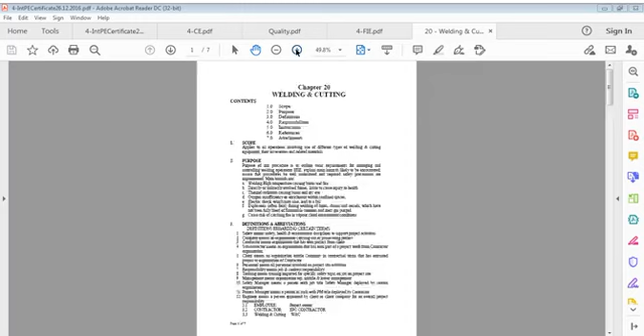These certificates cannot answer everything. Only work can answer, quality can answer, nothing else. Quality is part of life, but in fact, it's not part of life. That's the problem here. We always talk of quality and we respect quality. Quality, every day I cannot explain this way or that way. I think if you are interested, you have to learn.

You have to use your values, your knowledge, and learn it. That's the only way we can get quality improvement.

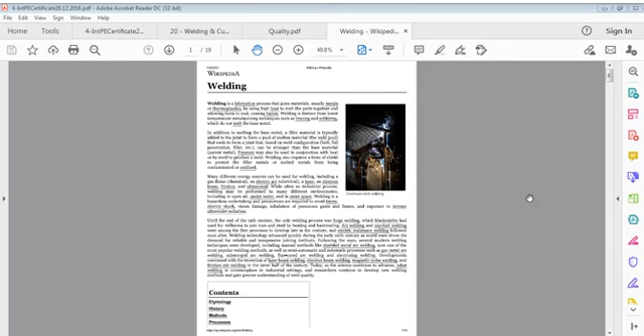Yesterday I was talking about welding and also quality as usual. Quality should be a part of life. It must be a part of life. But unfortunately, it's not a part of our life, as I explain all the time.

For many years I have been experiencing this, not only in this country but also in other countries, but now I'm talking about this country, Bharat, India, where quality actually is in minus rather than being at even zero. I can say quality does not exist anywhere in any branch of engineering or in other non-engineering sectors.

Quality is not meant what it should be. It has been used as a reference only. Every organization, every establishment thinks that having certifications of third party quality certification agencies, we can achieve whatever we want.

Certification, I think, of quality also has downgraded nowadays. Everybody claims that it is certified, but when you compare it to, when you evaluate it to product, to standards of product, well, I don't find any quality, and that's where I'm serious about.

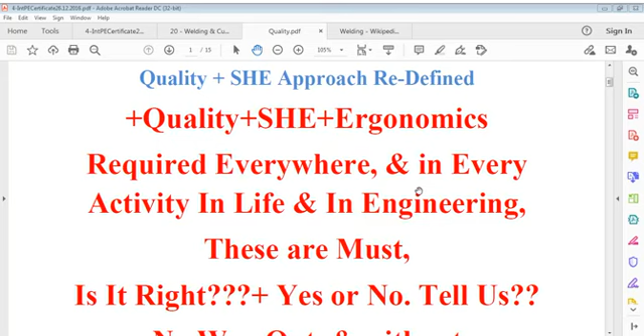Yes, they know that within this period, this material shall not suffer, this product shall work fine. They trust that, that trust they have, and that trust is their convincing power. This trust gives them a convincing power that they can convince the customer and consumer. My question is, a general question is, why should I care about warranty?

When I pay money, I pay for good product, for quality product, and I expect that whole life that product should work successfully. That's my understanding. And even then, after that, I am trapped by quality, warranted quality it has. Warranty means product shall perform, and that performance means product is made according to your requirement or specification.

That's what warranty means. But a product, if you buy, you expect that product should work for 10 years or 8 years or whatever number of years life may be of that product. Do you expect that in 1 year or 6 months or 1 week time we have to call that service, that manufacturer for service? You think that? Nobody thinks that. It's a product, it's a lifetime, and the warranty gives you a surety.

You have surety that this product shall be set right. But why do you think that 1 year warranty is enough for a 10 year product? Why should I think that? It means there is something wrong somewhere, that's why you are giving only 1 year warranty. Why do you want to give 1 year warranty and why should I accept that? Because this is a game plan, just to keep the customer shut up, calm.

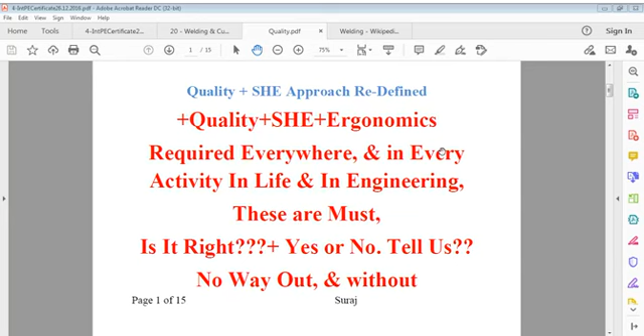Facts work in engineering, that is my first understanding. Without facts, engineering does not work. And facts: the product should be quality and should be safe for everybody, though safety is involved during production, not during performance, but performance should not go down to the level where safety is also compromised.

We'll talk of this a little later, but now my focus is on standards. I know maybe you say every day he talks this without any target. You can say that. How can you fix a target on such manufactured units or quality-required services where everybody is on the same track of no quality? There could be exceptions, I'm not saying there aren't. Everywhere there is 1%, 2%, say 5% maximum, where people are serious.

But otherwise, seriousness does not exist in anyone. It may be manufacturer, it may be industrialist, it may be other professionals like engineers, like others who are responsible to build society. Build means originally build. Engineers are called agents of society, agents of change, because whatever exists today in the form of physical development, material development, that is due to all engineers and the engineering world.

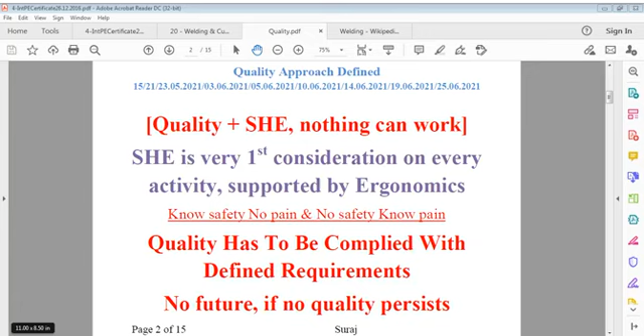Speaking is very easy, and we know doing is very difficult. Claiming is very easy, but responsibility on claims is very difficult. In the name of warranty, you can befool people, and people have no other option other than accepting what you say. But remember, even if people don't speak, they burn, self-burn. They are self-critical, because who has time to go back to the shopkeeper or to the industrialist or to the manufacturer to complain?

Everybody doesn't have that skill. Everybody cannot be so serious to fight for bad products, bad service, bad performance. It's not one product. Whatever you buy which is not natural, which is man-made or man-produced, has certain deficiencies all the time. It should not be there. Facts state that there should not be any deficiency, so that bad performance is avoided.

But disclaimer, you can say, is a very good term. It's a very easy term and a comfortable protective measure. Just put a disclaimer on something, or even on some document, that everything is beyond our control, and if you violate these conditions, even this warranty is void. It's very easy. Put any disclaimer and enjoy. So there's no claim on that. And moreover, when you buy something, it's clearly written in general cases that once material is sold, it shall not be returned.

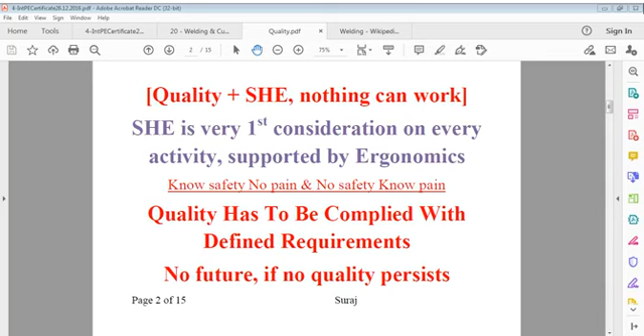That is basic. And if you can give me more, it's fine. Then I'll think to buy more and more. Simple. Because you have established trust with me. So we can say, yes, quality is complying. It means they are good people, they are professional, and we will not appreciate it so much as say this is professional work and they are professionals doing it. What's special in that? So it depends on compliance with quality, and absence of quality means no future.

Engineers must realize quality facts, because facts are part of the engineering world. It may not be prescribed in writing, but the fact still remains that you can't go free if you don't do quality work. God also tried to give quality work, but God was God and people are people. That's the difference.

Our quality system is questioned by me and by many others, because these vendors, shopkeepers, whoever they are, are very smart in managing quality and safety. They don't care. They expect only that the product should be built and sold. Your product is going to be used for many years. For sure, it should work. But when you experience it, you will find that this product cannot work for so many years.

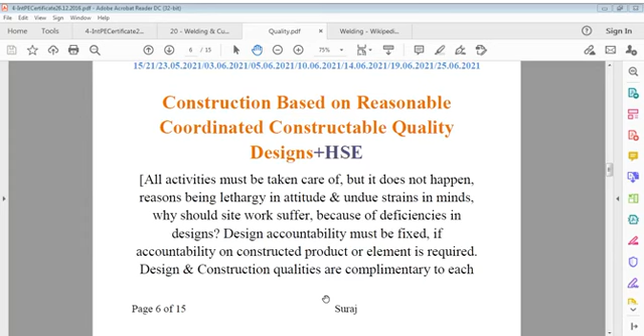Even engineers who are high profile take it on low profiles these days. A kind of understanding has been developed practically: let it go as it is, because there's no meaning in applying force, it's not going to change. That type of attitude has been developed. You may write, like I'm speaking now, you may make videos and publish. People are not interested, whatever you write, particularly youth.

In every age, youth is at stake of everything, but I don't consider it right. Youth means one has to learn. Youth doesn't mean only responsible. Youth has to learn. Youth has to mold to culture. Youth has to do a lot. Youth is energetic. Youth has energy quality, anxiety quality, hunger quality. Youth has to turn mature.

Transformation of youth stage to mature stage is required, and that's where quality input is given. Because youth was a student one time and had to learn. Then youth converted to adolescent, and that was also learning time. And now youth is fully qualified but not experienced. It's a very big challenge,

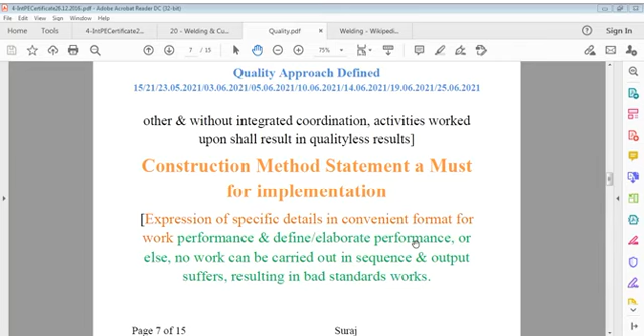Nowadays, and for more than the last 18 or 19 months, God has been busy teaching us. God tries to teach us, still trying to set ourselves right to requirement. We have to serve ourselves. We have to serve our clients. We have to serve everybody who is in that loop. Loop means the loop where quality moves from place to place. Safety moves from place to place, and a system is established. I'm talking about that.

It's not futile talk. This talk is very important, because we have to open our eyes. We have to open our minds. Engineers must open their minds and eyes, because the engineer is the only professional that can be hit by quality and that can hit others by quality. Hit means impact. If engineers don't care for this, I think it's horrible. It's like ghost work. If engineers can't care for quality, then we are destroying ourselves. We disintegrate ourselves.

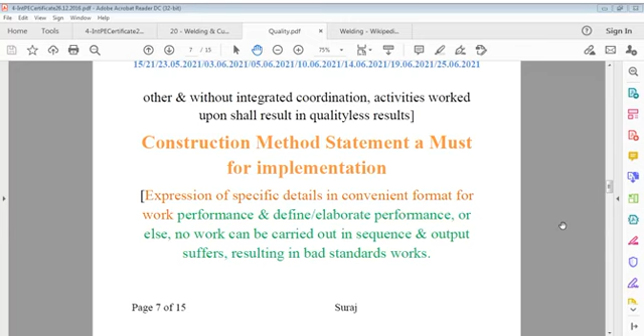Well, very boring talk. I move to something else now. I think I'll continue this. Let's go to something else also now.

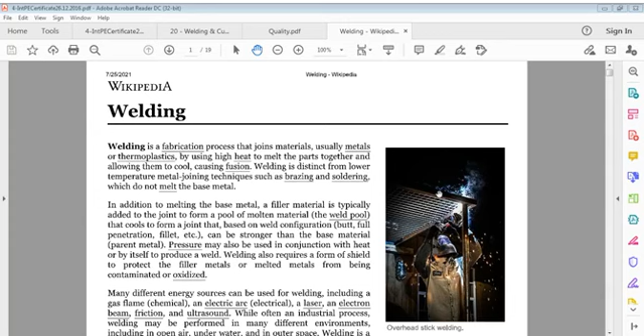I was talking of welding and cutting, which is a very important one, and I downloaded a Wikipedia page about welding, and we talked about what welding is, how it works, and a little history of welding. We talked of the term, how it worked, the history, and I can say we talked a lot on that.

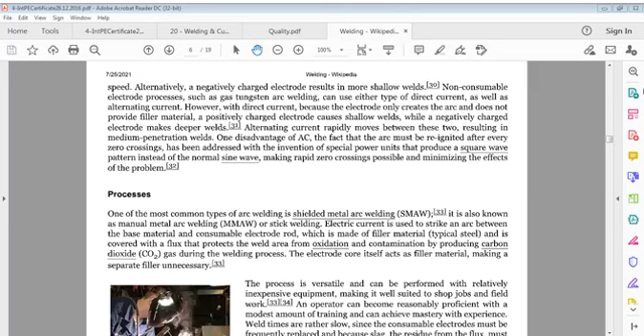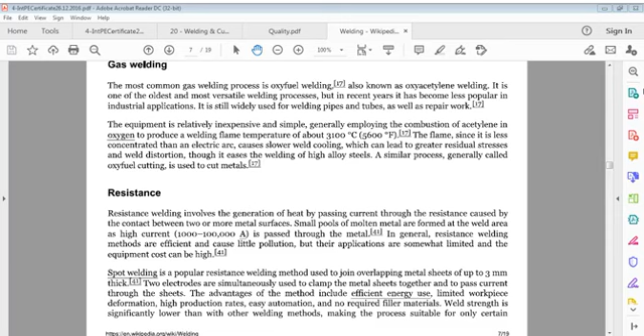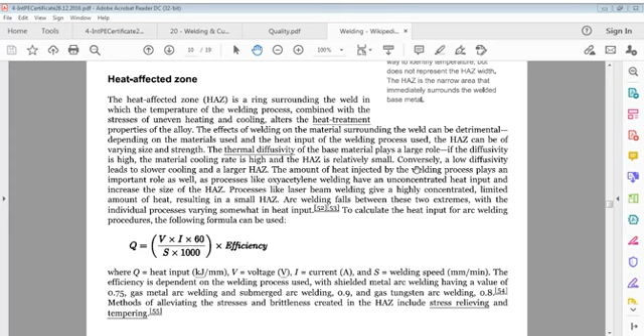Heat affected zone. I leave it to you for a couple of minutes so that I can go to the terrace and do what is required for a little while. Rest assured, by that time I'll be back and continue this technical discussion, which is about 8 pages. Then I will come back to the statement, and this is a very important page for general knowledge as well. So meanwhile, have rest, keep on this visual, read it, understand it, and I'll come back.

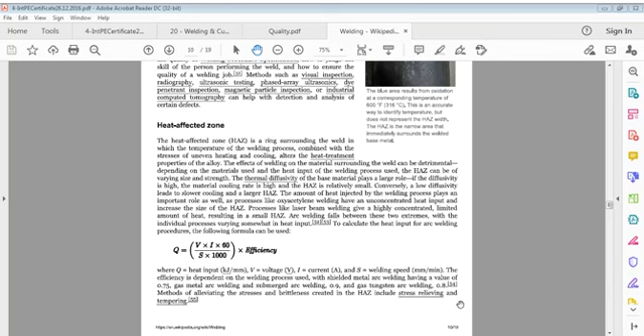we can say now I'm talking about welding, and it was heat affected zone we talked of yesterday. How to find heat input, that's a very important one. Heat affected zone, which we call HAZ.

HAZ is a ring surrounding the weld in which the temperature of the welding process, combined with stresses of uneven heating and cooling, alters the heat treatment properties of the alloy. That is the definition of heat affected zone. It means by welding, heat treatment properties of the alloy can be altered.

Effects of welding on material surrounding the weld can be detrimental, depending on materials used and heat input of the welding process used. Heat affected zone can be of varying size and strength. Thermal diffusivity of the base material plays a large role.

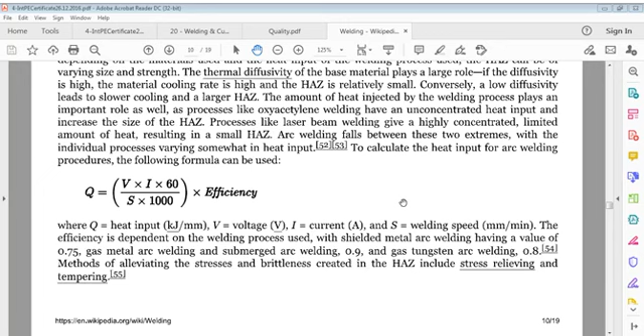Efficiency depends on the welding process used, with shielded metal arc welding having a value of 0.75, gas metal arc welding and submerged arc welding 0.9, and gas tungsten arc welding 0.8. Methods of alleviating stresses and brittleness created in the HAZ include stress relieving and tempering.

Now, lifetime extension with after-treatment methods. Durability and life of dynamically loaded welded steel structures is determined in many cases by welds, in particular weld transitions. Through a selective treatment of transitions by grinding, abrasive cutting, shot peening, high frequency impact treatment, etc., durability of many designs increases significantly.

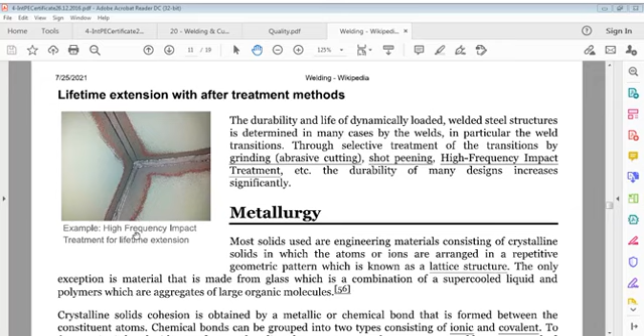So what do we say? Durability and life of dynamically loaded welded steel structures is determined in many cases by welds, in particular weld transitions. Through selective treatment of transitions by grinding, abrasive cutting, shot peening, high frequency impact treatment, etc., durability of many designs increases significantly. This is a photograph of an example, high frequency impact treatment for lifetime extension.

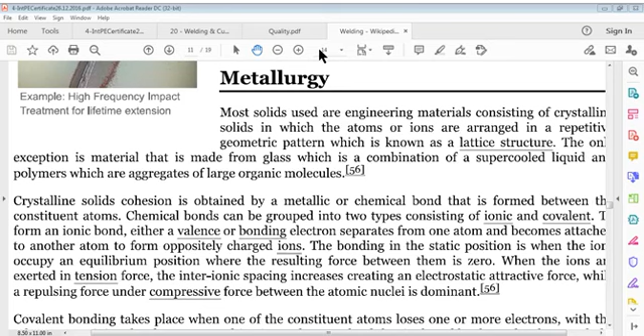Now metallurgy. Most solids used are engineering materials. It's not giving that correctly, so I take it 140, better. So it's okay.

Most solids used as engineering materials consist of crystalline solids in which atoms or ions are arranged in a repetitive geometric pattern, which is known as a lattice structure. The only exceptions are glass, which is a supercooled liquid, and polymers, which are aggregates of large organic molecules.

This is a very important statement. Definition of this material says the only exception is material where lattice structure is present in everyone. Most solids used as engineering materials consist of a crystalline structure, in which atoms or ions are arranged in a repetitive geometric pattern known as lattice structure. The only exception is glass, which is a combination of supercooled liquid, and polymers, which are aggregates of large organic molecules. In crystalline solids, cohesion is obtained by a metallic or chemical bond formed between constituent atoms.

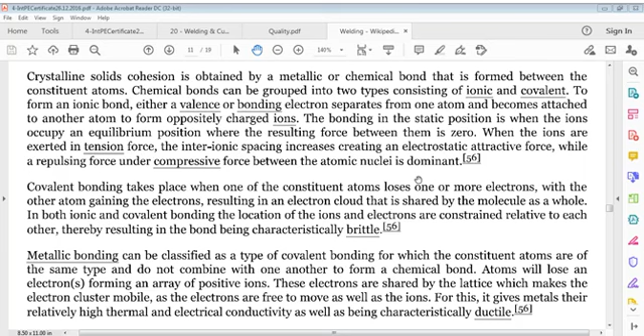Covalent bonding happens when one of the constituent atoms loses one or more electrons, with other atoms gaining electrons, resulting in an electron cloud that is shared by the molecule as a whole. In both ionic and covalent bonding, locations of ions and electrons are constrained relative to each other, resulting in the bond being characteristically brittle.

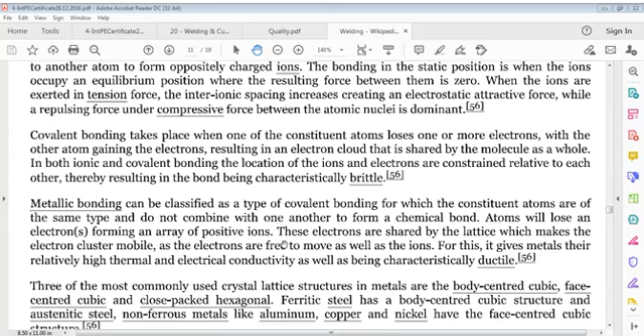Again: ions exerted in tension force increase inter-ionic spacing, creating an electrostatic attractive force, while a repulsive force under compression between atomic nuclei is dominant. The bond in static position is when ions occupy an equilibrium position where the resulting force between them is zero. Covalent bonding takes effect when one constituent atom loses one or more electrons, with another atom gaining them, resulting in an electron cloud shared by the molecule as a whole. In both ionic and covalent bonding, the locations of ions and electrons are constrained relative to each other, resulting in the bond being characteristically brittle.

Metallic bonding can be classified as a type of covalent bonding for which constituent atoms are of the same type and do not combine with one another to form a chemical bond. Atoms will lose an electron, forming an array of positive ions. These electrons are shared by the lattice, which makes the electron cluster mobile. As electrons are free to move, as well as ions, this gives metals their relatively high thermal and electrical conductivity, as well as being characteristically ductile.

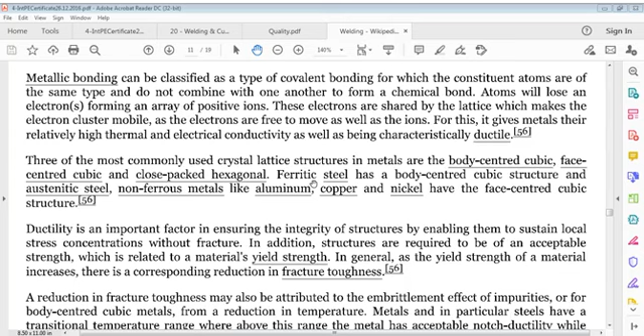Metallic bonding can be classified as a type of covalent bonding for which constituent atoms are of the same type and do not combine with one another to form a chemical bond. Atoms will lose an electron, forming an array of positive ions. These electrons are shared by the lattice, making the electron cluster mobile, as electrons are free to move as well as ions. This gives metals their relatively high thermal and electrical conductivity, as well as being characteristically ductile.

Three of the most commonly used crystal lattice structures in metals are: body-centered cubic, face-centered cubic, and close-packed hexagonal. Ferritic steel has a body-centered cubic structure.

Ferritic steel has a body-centered cubic structure, and austenitic steel and non-ferrous metals like aluminum, copper, and nickel have face-centered cubic structures.

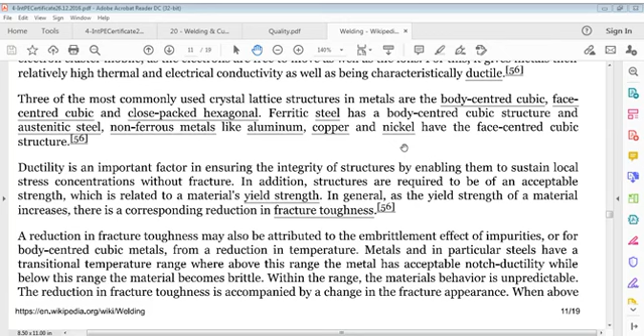A reduction in fracture toughness may also be attributed to the embrittlement effect of impurities or, for body-centered cubic metals, a reduction in temperature. Metals, particularly steels, have a transitional temperature range where above this range the metal has acceptable notch ductility, while below this range the material becomes brittle. Within the range, materials behave unpredictably. This reduction in fracture toughness is accompanied by a change in fracture appearance: above transition, fracture is primarily due to micro-void coalescence, resulting in a fibrous appearance; when temperature falls, fracture shows signs of cleavage facets. These two appearances are visible to the naked eye. Brittle fracture in steel plates may appear as chevron markings under a microscope.

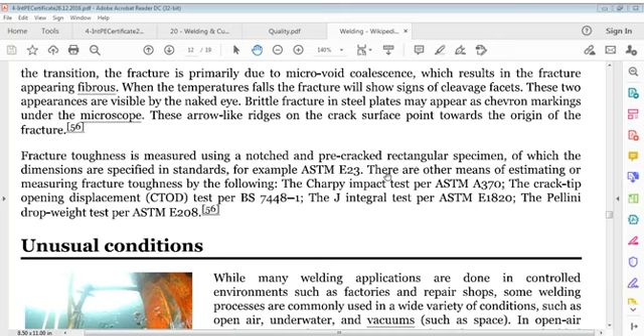So fracture toughness can be measured. We've seen that brittle fracture in steel plates may appear as chevron markings under a microscope - these arrow-like ridges on the cracked surface point toward the origin of the fracture. Fracture toughness is measured using a notched and pre-cracked rectangular specimen, with dimensions specified in standards, for example ASTM E23. There are other means of estimating or measuring fracture toughness, such as the Charpy impact test per ASTM A370, the crack tip opening displacement (CTOD) test per BS 7448-1, the J-integral test per ASTM E1820, and the drop weight test per ASTM E208. We'll also look at unusual conditions. Hold on, pause.

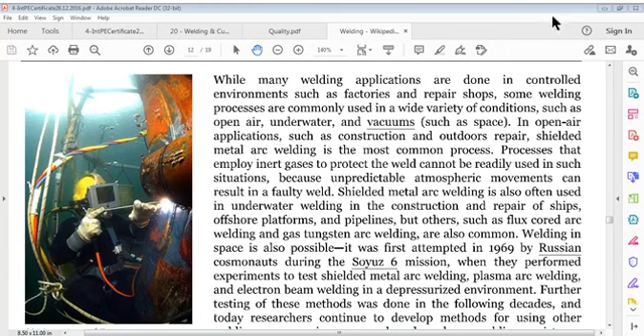Welding in space is also possible. It was first attempted in 1969 when Russian cosmonauts during the Soyuz 6 mission performed experiments to test shielded metal arc welding, plasma arc welding, and electron beam welding in a depressurized environment. Further testing of those methods was done in following decades, and today researchers continue to develop methods for using other welding processes in space, such as laser beam welding, resistance welding, and friction welding. Advances in these areas may be useful for future endeavors similar to construction of the International Space Station, which could rely on welding for joining in space parts that were manufactured on Earth.

Safety issues. Welding can be dangerous and unhealthy if proper precautions are not taken. However, using new technology and proper protection greatly reduces risks of injury and death associated with welding. Since many common welding procedures involve an open electric arc or flame, risk of burns and fire is significant. This is why it is classified as a hot work process.

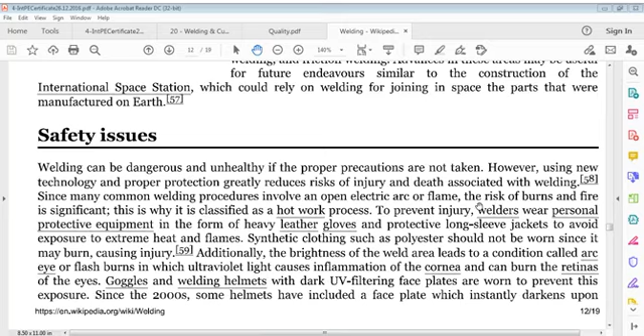Goggles and welding helmets with dark ultraviolet filtering face plates are worn to prevent this exposure. Since the 2000s, some helmets have included a faceplate which instantly darkens upon exposure to intense UV light.

To protect bystanders, the welding area is often surrounded with translucent welding curtains. These curtains are made of polyvinyl chloride plastic film and shield people outside the welding area from ultraviolet light of the electric arc, but cannot replace the filter glass used in the helmet.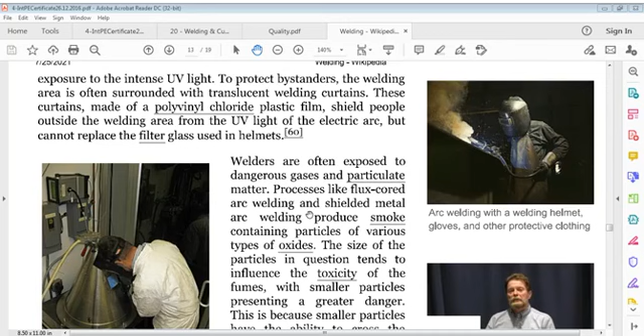Welders are often exposed to dangerous gases and particulate matter. Processes like flux cored arc welding and shielded metal arc welding produce smoke containing particles of various types of oxides. The size of particles in question tends to influence toxicity of fumes, with smaller particles presenting a greater danger.

This is because smaller particles have the ability to cross the blood-brain barrier. Fumes and gases such as carbon dioxide, ozone, and fumes containing heavy metals can be dangerous to welders lacking proper ventilation and training.

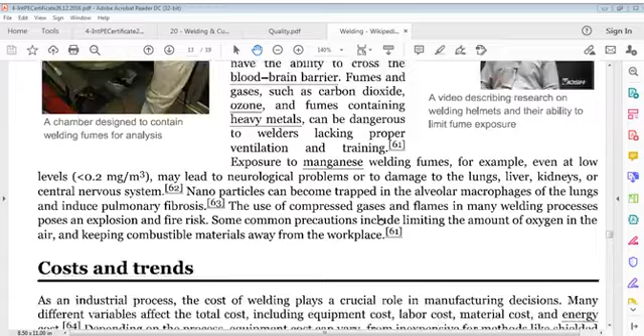Costs and trends. As an industrial process, the cost of welding plays a crucial role in manufacturing decisions. Many different variables affect total cost, including equipment cost, labor cost, material cost, and energy cost.

Depending on the process, equipment cost can vary from inexpensive for methods like shielded metal arc welding and oxyfuel welding, to extremely expensive for methods like laser beam welding and electron beam welding. Because of their high cost, they are only used in high production operations. Similarly, because automation and robots increase equipment costs, they are only implemented when high production is necessary.

Labor cost depends on deposition rate, rate of welding, hourly wage, and total operation time, including time spent fitting, welding, and handling the part. Cost of materials includes cost of base and filler material and cost of shielding gases. Finally, energy cost depends on arc time and welding power demand.

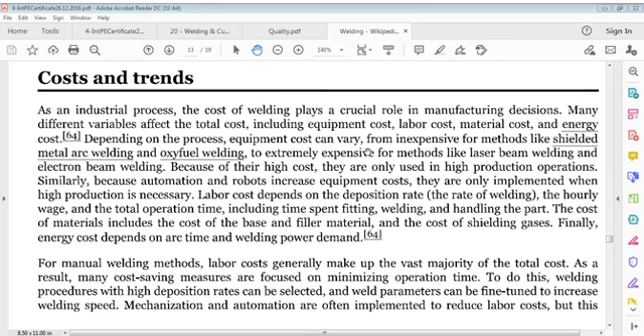For manual welding methods, labor cost generally makes up the vast majority of total cost. As a result, many cost saving measures are focused on minimizing operation time. To do this, welding procedures with high deposition rates can be selected and weld parameters can be fine-tuned to increase welding speed. Mechanization and automation are often implemented to reduce labor costs, but this frequently increases cost of equipment and creates additional setup time. Material costs tend to increase when special properties are necessary, and energy costs normally do not amount to more than several percent of total welding cost.

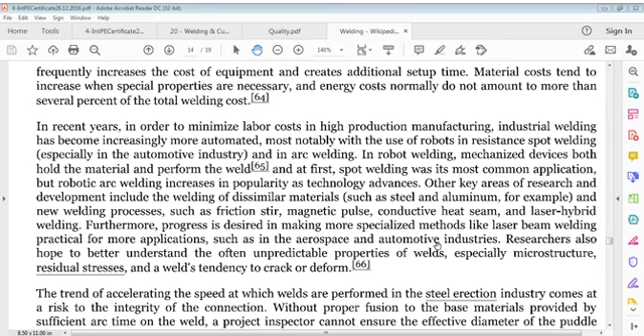Furthermore, progress is desired in making more specialized methods like laser beam welding practical for more applications, such as in aerospace and automotive industries. Researchers also hope to better understand often unpredictable properties of welds, especially microstructure, residual stresses, and a weld's tendency to crack or deform.

Trend of accelerating speed at which welds are performed in steel erection industry comes at a risk to integrity of connection. Without proper fusion to base materials provided by sufficient time on weld, a project inspector cannot ensure effective diameter of puddle weld. Therefore, he or she cannot guarantee published load capacities unless they witness actual installation.

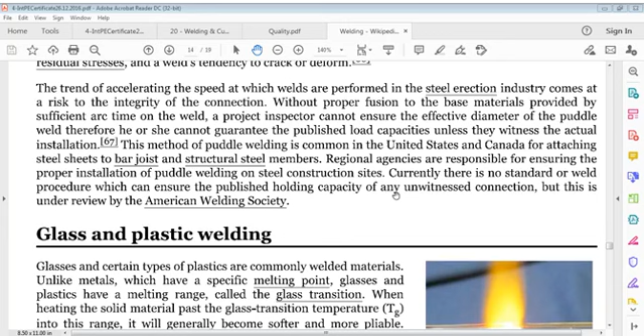This method of puddle welding is common in United States and Canada for attaching steel sheets to bar joist and structural steel members. Regional agencies are responsible for ensuring proper installation of puddle welding on steel construction sites. Currently, there is no standard or weld procedure which can ensure published holding capacity of any unwitnessed connection, but this is under review by American Welding Society. Glass and plastic weld.

Glass and plastic welds. Glasses and certain types of plastics are commonly welded materials. Unlike metals which have a specific melting point, glasses and plastics have a melting range called glass transition. When heating solid material past glass transition temperature into this range, it will generally become softer and more pliable.

When it crosses through range above glass melting temperature, it would become a very thick, sluggish, viscous liquid, slowly decreasing in viscosity as temperature increases. Typically, this viscous liquid shall have very little surface tension compared to metals, becoming a sticky, taffy and honey-like consistency. So welding can usually take place by simply pressing two melted surfaces together. Two liquids will generally mix and join at first contact.

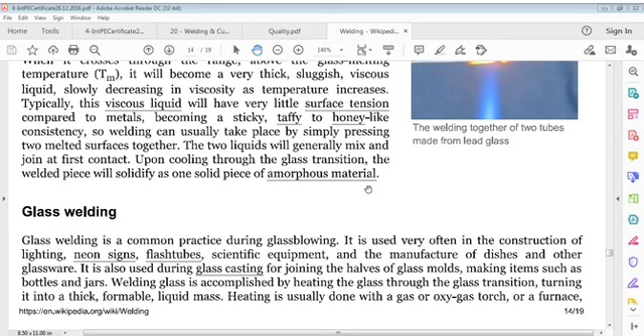Welding glass is accomplished by heating glass through glass transition, turning it into a thick, formable liquid mass. Heating is usually done with a gas or oxy-gas torch or a furnace. Temperatures for melting glass are often quite high. This temperature may vary depending on type of glass. For example, lead glass becomes a weldable liquid at around 870 degrees Celsius and can be welded with a simple propane torch.

On the other hand, quartz glass is fused silica. Then we can say 870 degrees Celsius can be welded with a simple propane torch. On the other hand, quartz glass, which is fused silica, must be heated to over 1650 degrees Celsius, but quickly loses its viscosity and formability if overheated. So an oxyhydrogen torch must be used. Sometimes a tube may be attached to glass, allowing it to be blown into various shapes.

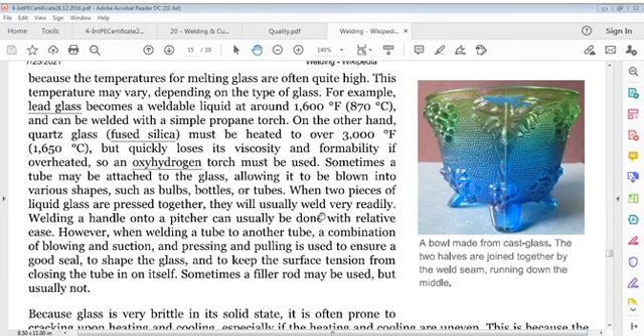When two pieces of liquid glass are pressed together, they shall usually weld very readily. Welding a handle onto a pitcher can usually be done very readily. When two pieces of glass are pressed together, they will usually weld very readily. Welding a handle onto a pitcher can usually be done with relative ease. However, when welding a tube to another tube, a combination of blowing and suction and pressing and pulling is used to ensure a

So we can say in this case, however, when welding a tube to another tube, a combination of blowing and suction and pressing and pulling is used to ensure a good seal, to shape glass and to keep surface tension from closing the tube on itself. Sometimes a filler rod may be used, but usually not.

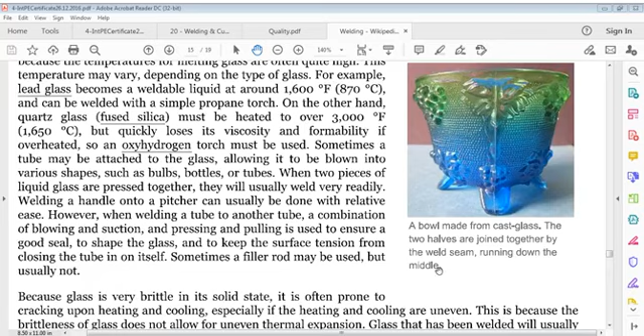Because glass is very brittle in its solid state, it's often prone to cracking upon heating and cooling, especially if heating and cooling are uneven. This is because brittleness of glass does not allow for uneven thermal expansion. Glass that has been welded shall usually need to be cooled very slowly and evenly through glass transition in a process called annealing, to relieve any internal stresses created by temperature gradient.

There are many types of glasses, and it's most common to weld using same types. Different glasses often have different rates of thermal expansion, which can cause them to crack upon cooling when they contract differently. For instance, quartz has very low thermal expansion, while soda lime glass has very high thermal expansion.

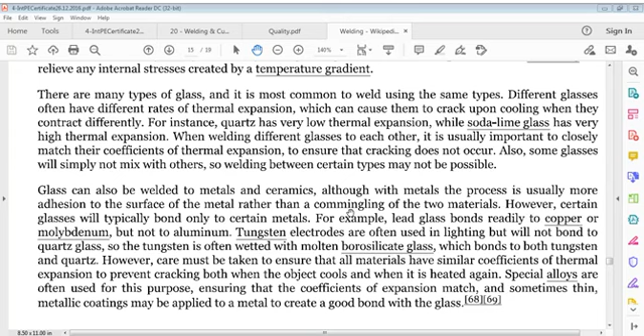When welding different glasses to each other, it's usually important to closely match their coefficients of thermal expansion to ensure that cracking doesn't occur. Also, some glasses simply do not mix with others, so welding between certain types may not be possible.

Glass can also be welded to metals and ceramics, although with metals the process is usually more adhesion to the surface of the metal rather than a commingling of two materials.

Glass can also be welded to metals and ceramics, although with metals the process is usually more adhesion to the surface of the metal rather than a commingling of two materials. However, certain glasses will typically bond only to certain metals. For example, lead glass bonds readily to copper or molybdenum, but not to aluminum. Tungsten electrodes are often used in lighting but will not bond to quartz glass.

So tungsten is often wetted with molten borosilicate glass.

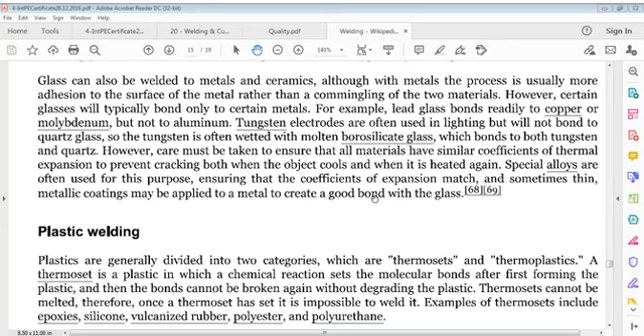Special alloys are often used for this purpose, ensuring that coefficients of expansion match, and sometimes thin metallic coatings may be applied to the metal to create a good bond with glass. Plastic welding.

Plastics are generally divided into two categories, which are thermosets and thermoplastics. A thermoset is a plastic in which a chemical reaction sets molecular bonds after first forming the plastic, and then the bonds cannot be broken again without degrading the plastic. Thermosets cannot be melted; therefore, once a thermoset has set, it is impossible to weld it. Examples of thermosets include epoxies, silicone, vulcanized rubber, polyester, and polyurethane.

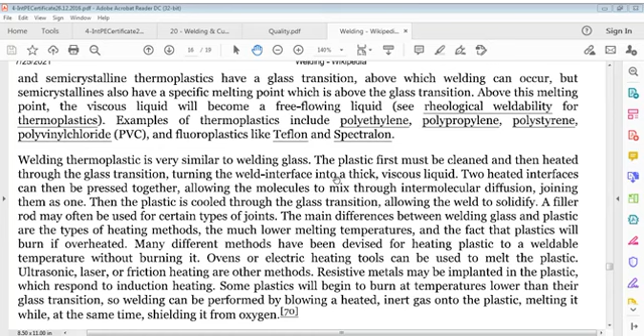Welding thermoplastics is very similar to welding glass. The plastic first must be cleaned and then heated through the glass transition, turning the weld interface into a thick viscous liquid. Two heated interfaces can then be pressed together, allowing molecules to mix through intermolecular diffusion.

Two heated interfaces can then be pressed together, allowing molecules to mix through intermolecular diffusion, joining them as one. Then the plastic is cooled through the glass transition, allowing the weld to solidify.

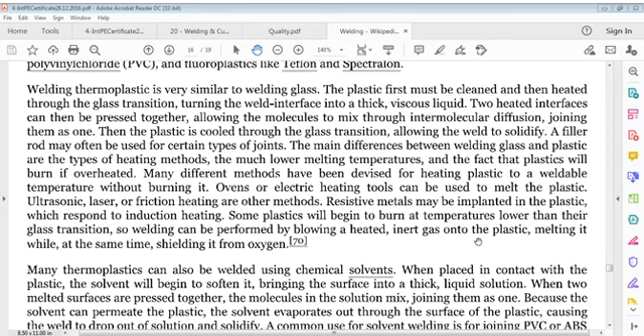Many thermoplastics can also be welded using chemical solvents. When placed in contact with plastic, the solvent begins to soften it, bringing soft surfaces into a thick liquid solution. When two melted surfaces are pressed together, molecules in solution mix, joining them as one. Because the solvent can permeate plastics, the solvent evaporates out through the surfaces of the plastics, causing the weld to drop out of solution and solidify.

A common use for solvent welding is for joining PVC or ABS. ABS is acrylonitrile butadiene styrene, pipes during plumbing, or welding styrene and polystyrene plastics.

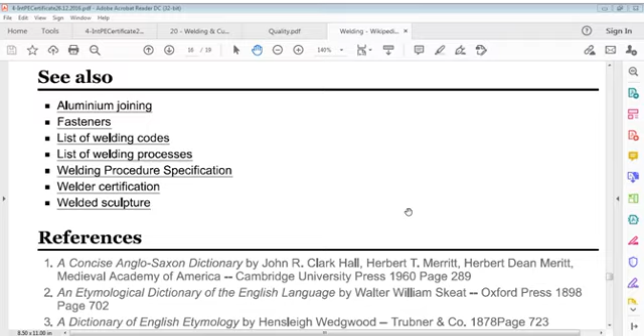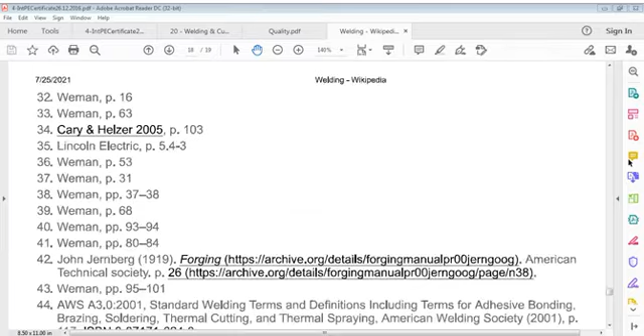So solvent welding is especially effective on plastics like PVC, which burn at or below their glass transition, but may be ineffective on plastics like Teflon or polyethylene that are resistant to chemical decomposition. So we can go back to see what we have done or learned.

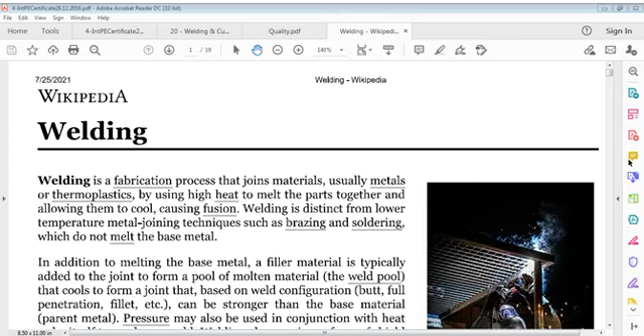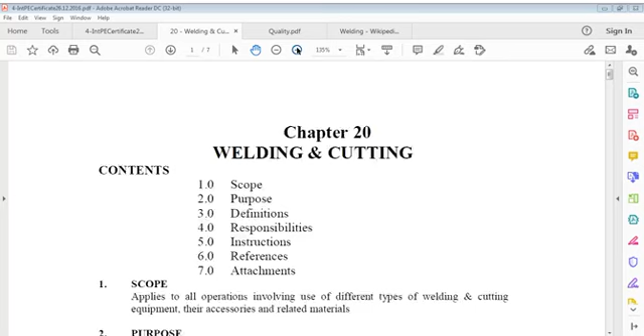It's welding, an interesting one. And now we'll go to our understanding of this welding method statement, which is actually our requirement. In this we have gone to see what the welding method statement was. The scope is that it applies to operations involving use of different types of welding and cutting equipment, their accessories and related materials. This is our scope in this method statement.

The purpose of this statement is to outline basic requirements for managing, organizing and controlling welding operations, explain the main SHE hazards likely to be encountered, and assure that procedures are well understood and required safety precautions are implemented. The main hazards which we observe are welding high temperature causing burns and fire. This is the first one.

Directly or indirectly evolved fumes liable to cause injury to health. Thermal radiation causing burns and arc eye, oxygen insufficiency or enrichment within confined spaces, electric shock which may also lead to a fall,

explosions, often fatal, during welding of tanks, drums and vessels which have not been fully freed of inflammable contents, and inert gas purged, causing risk of catching fire in vapor cloud environment conditions. These are a few. I repeat this, it's very important from every viewpoint.

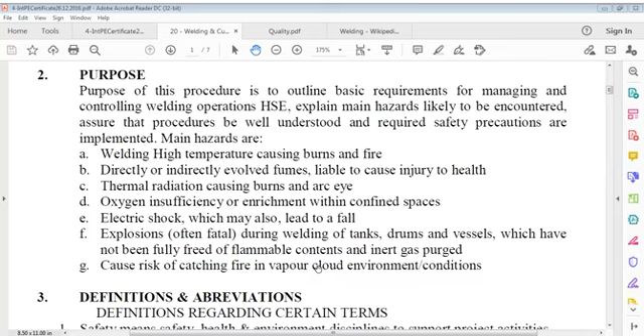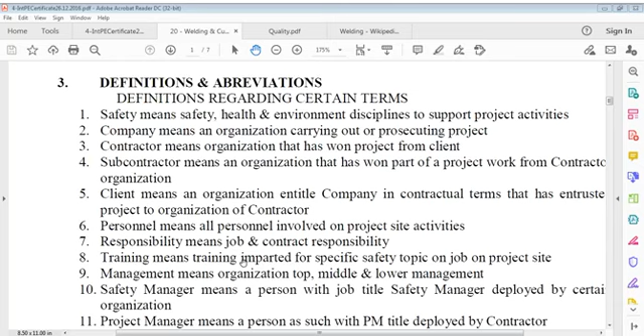Definitions. It's repetitive, but because this is the welding one, let us see. Safety means safety, health and environment discipline to support project activities. Company, contractor, subcontractor, client, as we defined before, and personnel, responsibility, training and management, safety, project management. Okay, let's go further. Competent person: a person nominated as competent to assume overall control of welding and cutting operations.

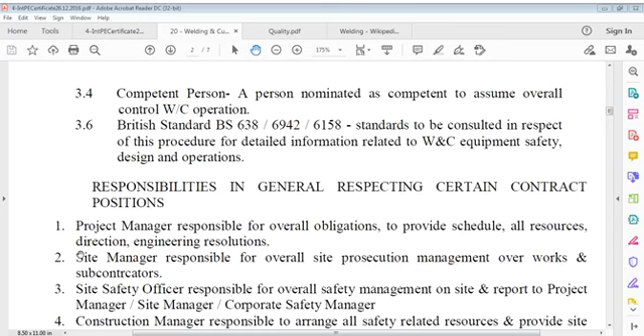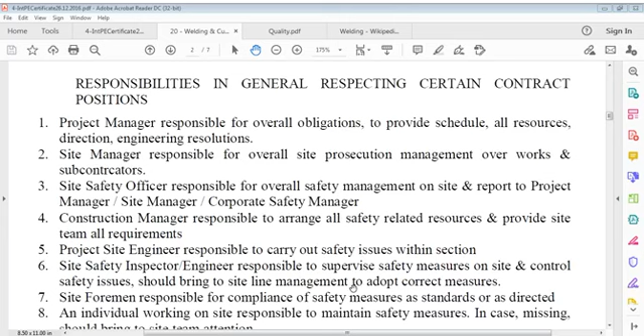British standard BS 638/6942/6158 standards to be consulted in respect of this procedure for detailed information related to welding and cutting equipment safety, designs and operations. Responsibilities in general respecting certain contract positions, and these are, I think, same as before: project manager, site manager, safety one, construction manager, project site engineer. So there's nothing specific in this.

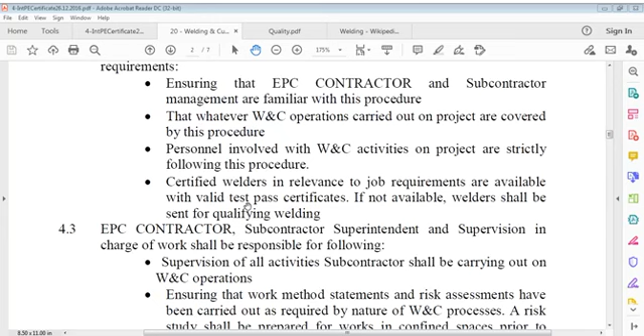Certified welder is very important here. Certified welders relevant to job requirements must be available, that's why I have to make sure, with valid test pass certificates. If not available, welders shall be sent for qualifying that test. So let us see this.

EPC contractor, what is this? Supervision of all activities the subcontractor shall be carrying out on welding and cutting operations, ensuring that work method statements and risk assessments have been carried out as required by the nature of welding and cutting processes. A risk study shall be prepared.

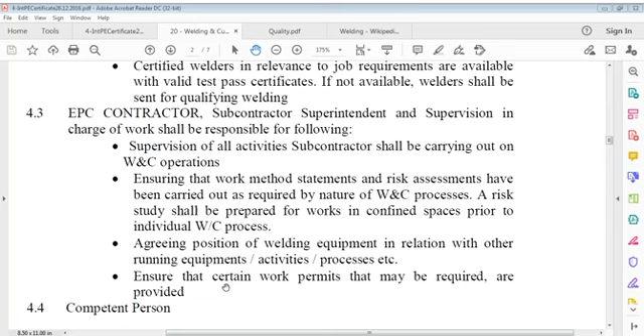Ensuring that work method statement and risk assessment have been carried out as required by the nature of welding and cutting processes. A risk study shall be prepared for works in confined spaces prior to individual welding or cutting process. Agreeing position of welding equipment in relation with other running equipment, activities, processes. Ensure that certain work permits that may be required are provided.

Competent person. For the purpose of this procedure, whichever subcontractor organization is involved in welding and cutting operations on site shall appoint a competent person approved by the EPC contractor to have overall control of welding and cutting operations. Competent person's duties specified cover assessment and planning of welding and cutting activities with regard to selection of safety gear, equipment, instructions and supervision.

Ensure that equipment selected has been adequately inspected and maintained. Arrange for replacement in case of equipment breakdown. Ensure that an effective procedure is implemented for reporting defects, taking into account remedial actions. Responsibility for organization and control of welding and cutting operations, stopping all unsafe operations and reporting all incidents. Act according to requirement in case of fire breakout due to welding effects.

So let's repeat. What the competent person's duties specifically cover is assessment and planning of welding and cutting activities with regard to selection of safety gear, equipment, instruction and supervision. Ensure that equipment selected is adequately inspected, tested and maintained. Arrange for replacement in case of equipment breakdown. Ensure that an effective procedure is implemented for reporting defects, taking into account remedial actions.

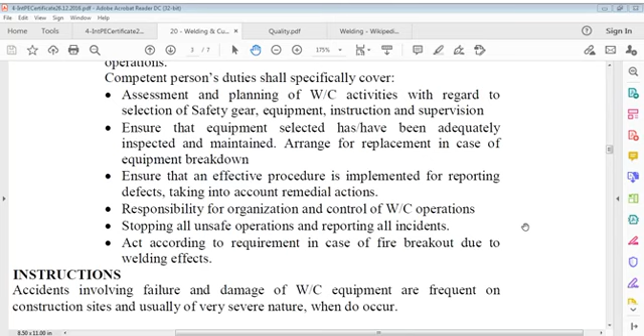Responsibility for organization and control of welding and cutting operations, stopping all unsafe operations and reporting all incidents, acting according to requirement in case of fire breakout due to welding effects. Instructions.

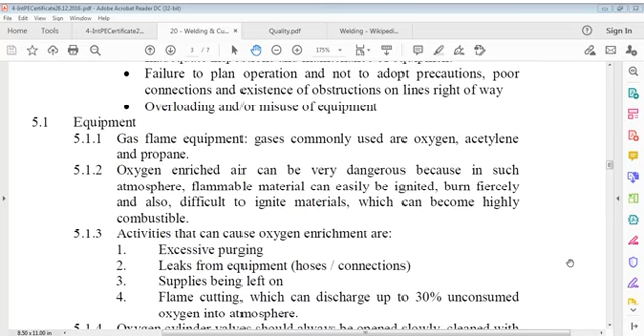Accidents involving failure and damage to welding and cutting equipment are frequent on construction sites and usually of a very severe nature when they do occur. Causal factors leading to such accidents include operator's error, inadequate inspection and maintenance of equipment, failure to plan the operation and to adopt precautions, poor connections and existence of obstructions on lines, right of way, overload and/or misuse of equipment.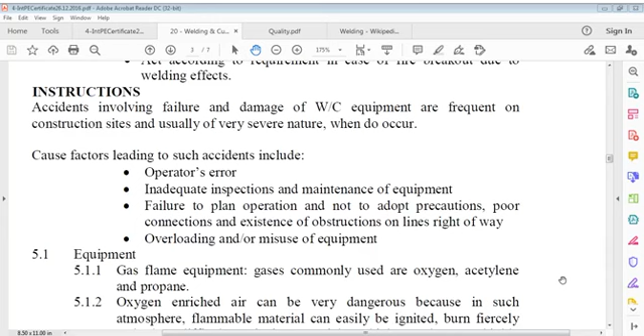Gas flame equipment commonly uses oxygen, acetylene and propane. Oxygen enriched air can be very dangerous because in such an atmosphere, flammable material can easily be ignited and burn fiercely, and even difficult-to-ignite materials can become highly combustible.

Activities that can cause oxygen enrichment are excessive purging, leaks from equipment, hoses and connections, supplies being left on, and flame cutting, which can discharge up to 30% unconsumed oxygen into the atmosphere.

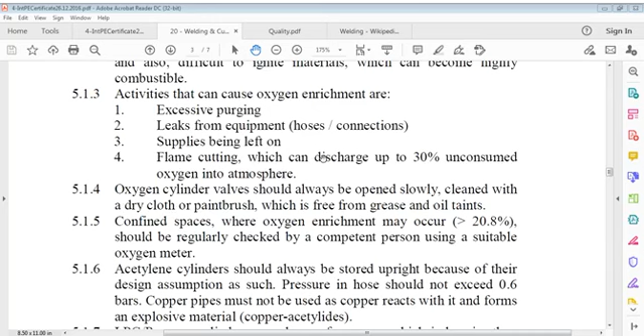Oxygen cylinder valves should always be opened slowly and cleaned with a dry cloth or paintbrush free from grease and oil taints. Confined spaces where oxygen enrichment may occur greater than 20.8% should be regularly checked by a competent person using a suitable oxygen meter.

Acetylene cylinders should always be stored upright.

Oxygen cylinder valves should always be opened slowly and cleaned with a dry cloth or paintbrush that is free from grease and oil taints. Confined spaces where oxygen enrichment may occur greater than 20.8% should be regularly checked by a competent person using a suitable oxygen meter. Acetylene cylinders should always be stored upright because of their design assumptions.

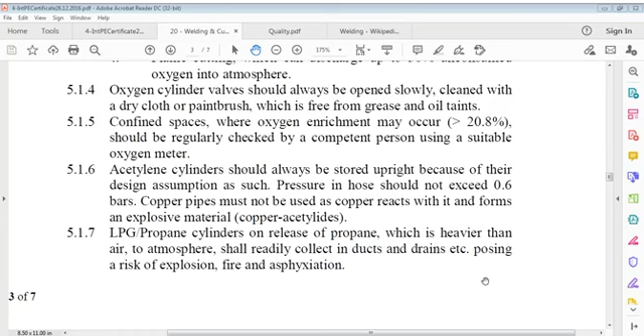Fuel gas and oxygen supplies should be stored separately, at least 6 meters apart in the open. If kept inside, the store should be of fire-resisting construction with ventilation provided at top and bottom. Lighting illumination to the store should be either from outside the store, or the structure should be made of flame-proof construction.

All cylinders in use must be kept secured, either in a cylinder trolley or lashed to a suitable support. Acetylene and propane cylinders must always be used in an upright position, because liquid may discharge through the valve or damage equipment.

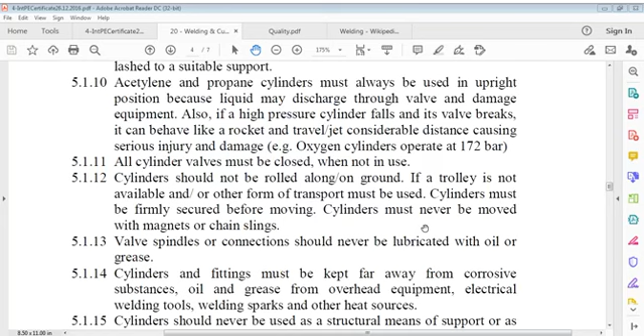All cylinder valves must be closed when not in use. Cylinders should not be rolled along the ground. If a trolley is not available, other forms of transport must be used, and cylinders must be firmly secured before moving. Cylinders must never be moved with magnets or chain slings.

Valve spindles or connections should never be lubricated with oil or grease. Cylinders and fittings must be kept far away from corrosive substances, oil and grease, overhead equipment, electrical welding tools, welding sparks and other heat sources.

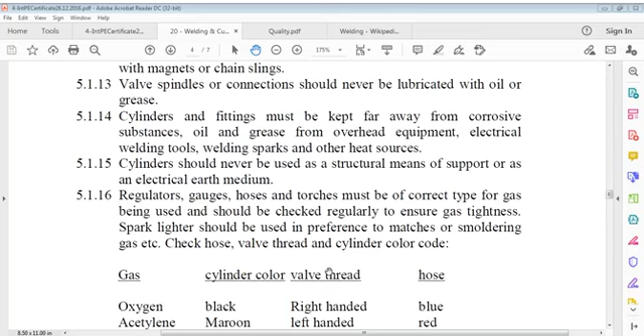Cylinders should never be used as a structural means of support or as an electrical earth medium. Regulators, gauges, hoses and torches must be of the correct type for the gas being used, and should be checked regularly to ensure gas tightness.

A spark lighter should be used in preference to matches or smoldering gas. Check the hose, valve thread and cylinder's color code. What are those? Gas, cylinder color, valve thread and hose.

Oxygen is black cylinder color, valve thread is right-handed, hose is blue. Acetylene is maroon color cylinder, valve is left-handed.

So, oxygen cylinder is black, right-handed, hose is blue. Acetylene cylinder is maroon, left-handed, hose is red. Propane cylinder is red, left-handed, hose is orange.

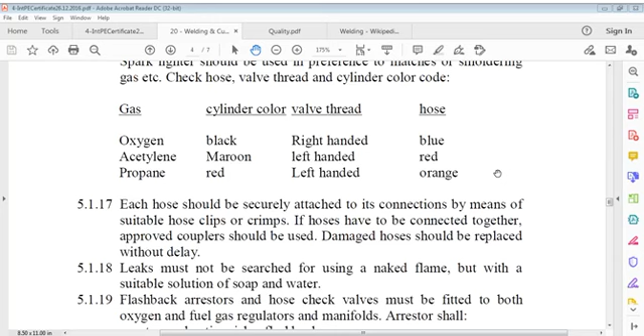Each hose should be securely attached to its connections by means of suitable hose clips or crimps. If hoses have to be connected together, approved couplers should be used. Damaged hoses should be replaced without delay. Leaks must not be searched for with a naked flame.

We can see now each hose should be securely attached to its connection by means of suitable hose clips or crimps. If hoses have to be connected together, approved couplers should be used. Damaged hoses should be replaced without delay.

Leaks must not be searched for using a naked flame, but with a suitable solution of soap and water.

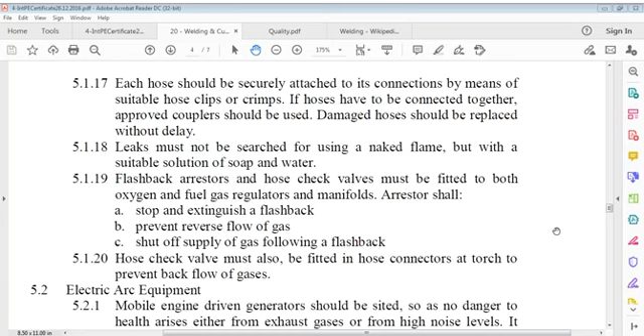Flashback arresters and hose check valves must be fitted to both oxygen and fuel gas regulators and manifolds. Arresters shall stop and extinguish a flashback.

They prevent reverse flow of gas and shut off supply of gas following a flashback. Hose check valves must also be fitted in hose connectors at the torch to prevent backflow of gases.

Electric arc equipment: mobile engine driven generators should be sited so that no danger to health arises either from exhaust gases or from high noise levels.

It should be located far away from the work area, and extension leads provided to bring welding electrical supplies to the work point.

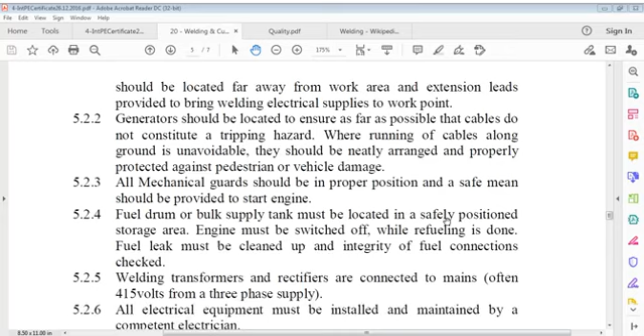Generators should be located to ensure, as far as possible, that cables do not constitute a tripping hazard. Where running of cables along the ground is unavoidable, they should be neatly arranged and properly protected against pedestrian or vehicle damage. All mechanical guards should be in proper position and a safe means should be provided to start the engine.

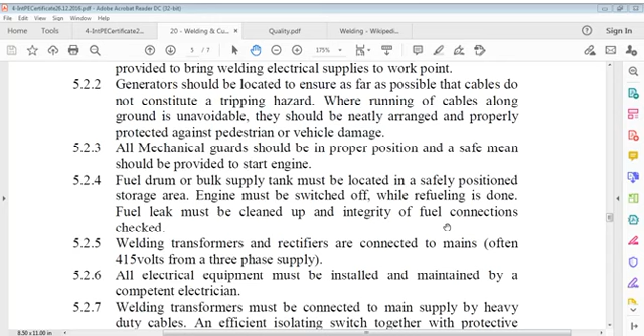Fuel drum or bulk supply tank must be located in a safely positioned storage area.

The engine must be switched off while refueling is done. Fuel leaks must be cleaned up and the integrity of fuel connections checked.

Welding transformers and rectifiers. Welding transformers and rectifiers are connected to mains, often at 415 volts from a 3-phase supply.

All electrical equipment must be installed and maintained by a competent electrician. Welding transformers must be connected to the main supply.

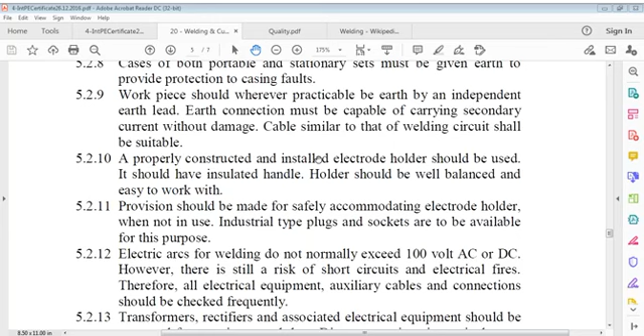A properly constructed and installed electrode holder should be used. It should have an insulated handle, be well balanced and easy to work with. Provision should be made for safely accommodating the electrode holder when not in use; industrial type plugs and sockets are to be available for this purpose.

Electric arcs for welding do not normally exceed 100 volts AC or DC. However, there is still a risk of short circuit and electrical fires. Therefore, all electrical equipment, auxiliary cables and connections should be checked frequently. Transformers, rectifiers and associated electrical equipment should be protected from moisture and dust.

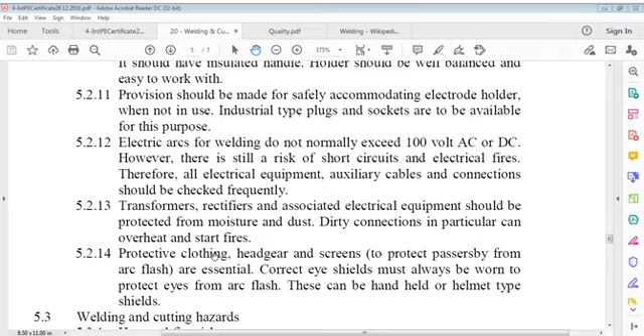Dirty connections in particular can overheat and start fires. Protective clothing, headgears and screens to protect passersby from arc flash are essential. Correct eye shields must always be worn to protect eyes from arc flash; these can be handheld or helmet type shields.

Welding and cutting hazards: heat and fire risks. There is a heat and fire risk.

I think we should take it later, it's already more than three hours. We'll take it later, the remaining one, because this is very important.